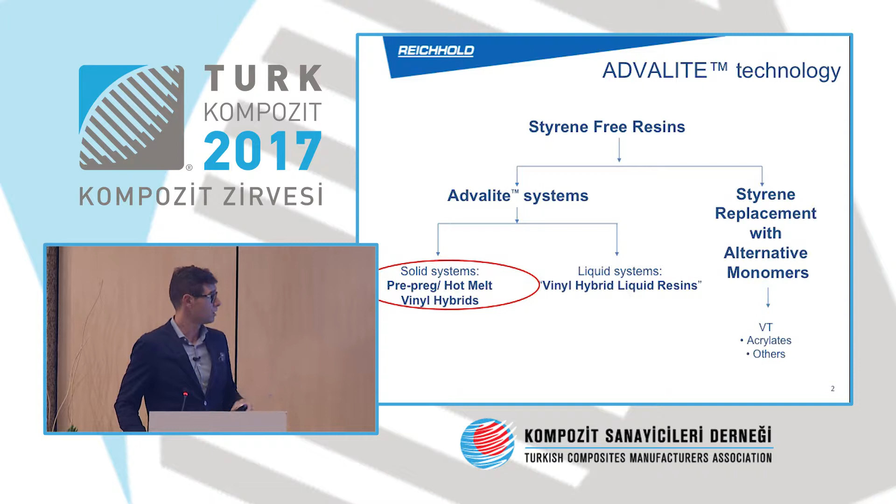So you have basically two systems to avoid the utilization of styrene in the resin. Use styrene replacement like acrylate or the alternative monomer, or you can use ADVALITE system that is a completely styrene and monomer free resin. So in this case we develop a hot melt prepreg system and liquid system.

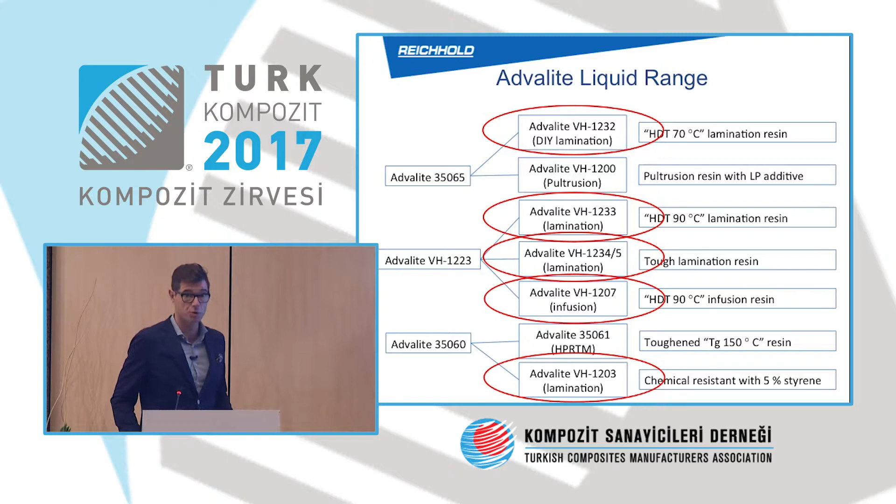As you can see, we have different kind of resin for lamination, standard resin for lamination, resin for lamination with high HDT, resin for difficult part, difficult lamination, and also resin for infusion. Mechanical properties of ADVALITE resin are really good, close to isophthalic resin properties.

And as you can see, after just one day without post-curing, you can get good HDT, good residual enthalpy, and good TG. And after 3 weeks with only 24 hours at 60 degrees, you achieve 100% of resin properties. So it means that you have a good elongation, similar to vinyl ester resin. Residual enthalpy is close to 0, and HDT is close to 80 degrees. So performance of the resin are guaranteed also without post-curing and in a really short time.

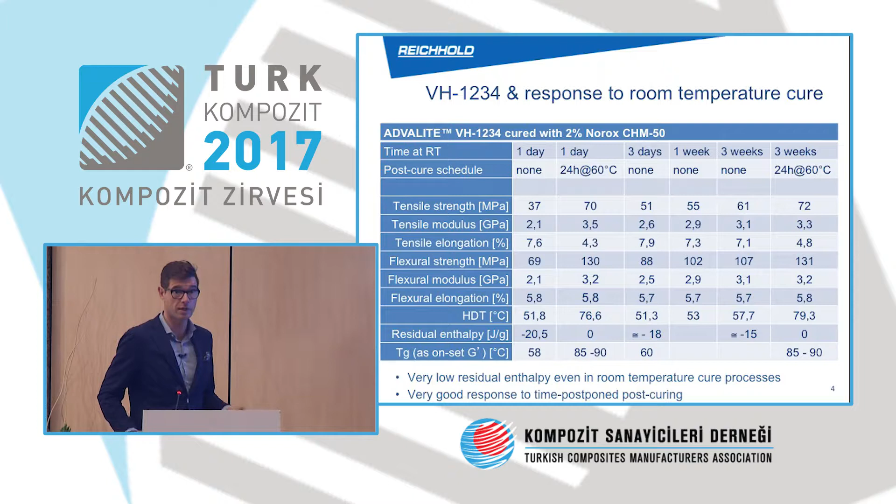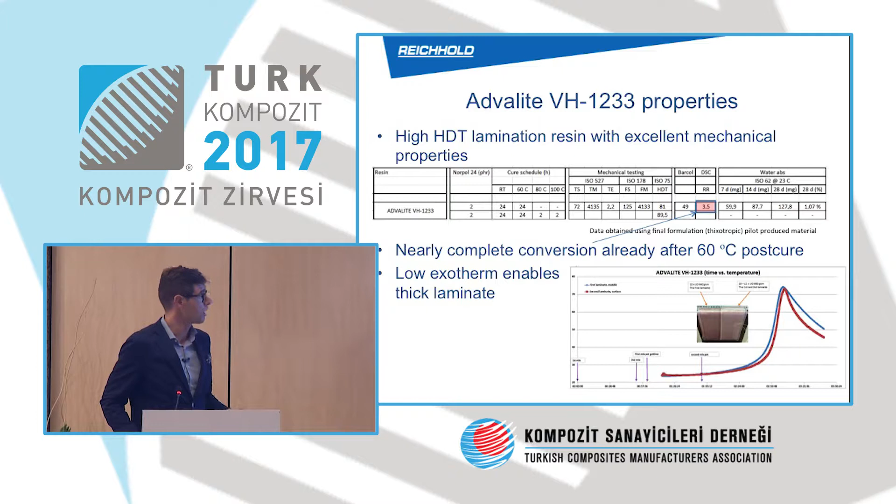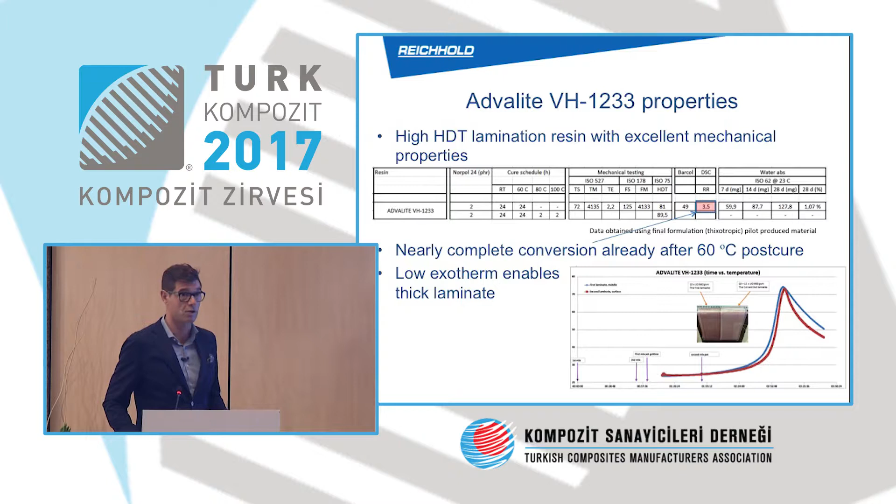Regarding ADVALITE for infusion, we developed this VH1207. It's a really good resin with good flowing, good gel time that you can adjust and manage only changing the catalyst. So in case you want 1 hour of gel time, you can use catalyst like Trigonox 239 to have an example. Or if you want a speed infusion, if you have to infuse a small piece, you can just change the catalyst and use something like Butanox LPT.

Also in this case you have a really good reactivity, fast curing, and exotherm peak is every time really low. Sorry.

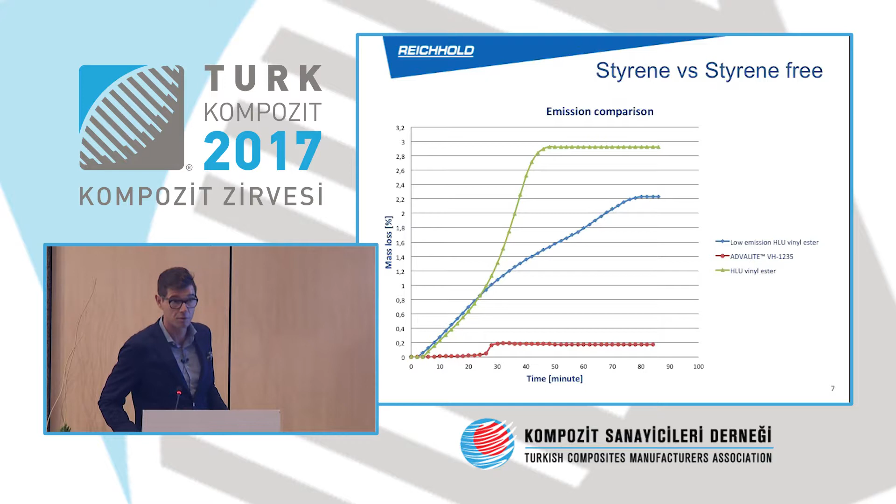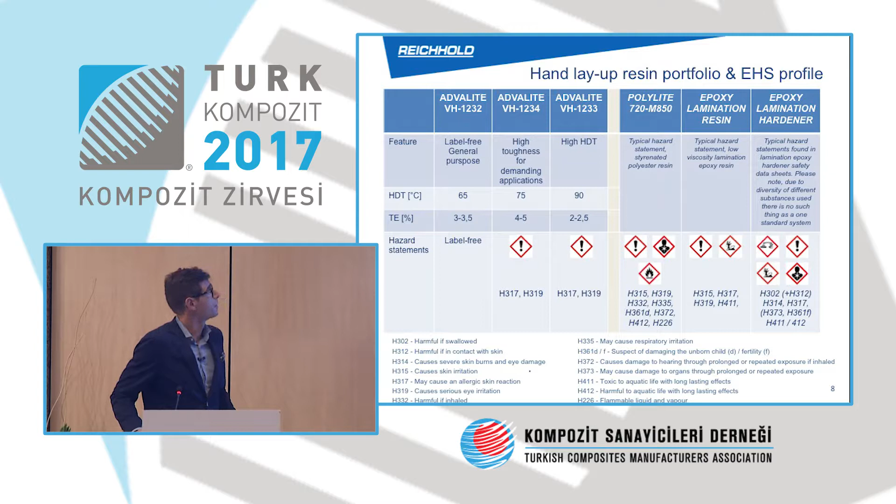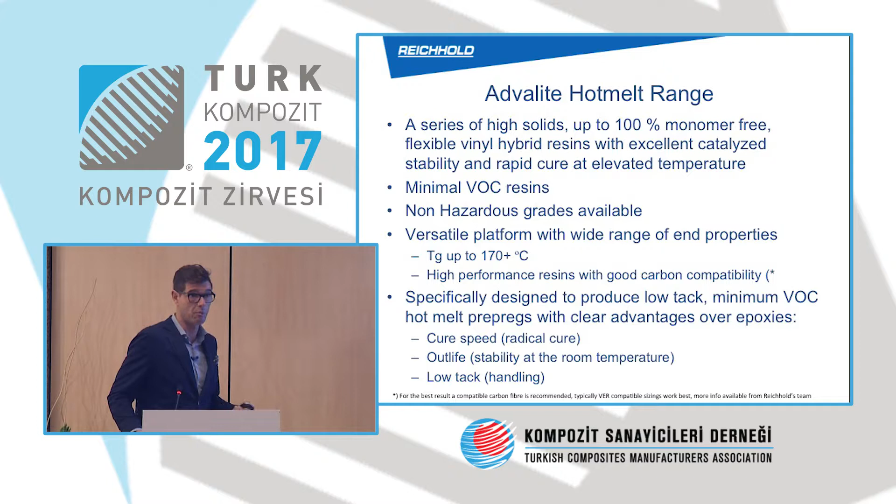In the ADVALITE project we developed and we are developing also resin for hot melt process, so prepreg resin to use with carbon fiber and to make different parts with a different process. So, but this kind of product are still under development, but we are getting a really good result also in this case.

Here you can see a benefit of ADVALITE resin compared to epoxy resin because you have in this case really good stability at room temperature instead of epoxy resin where you have to put it at low temperature, and you have a really good workability with this kind of resin.

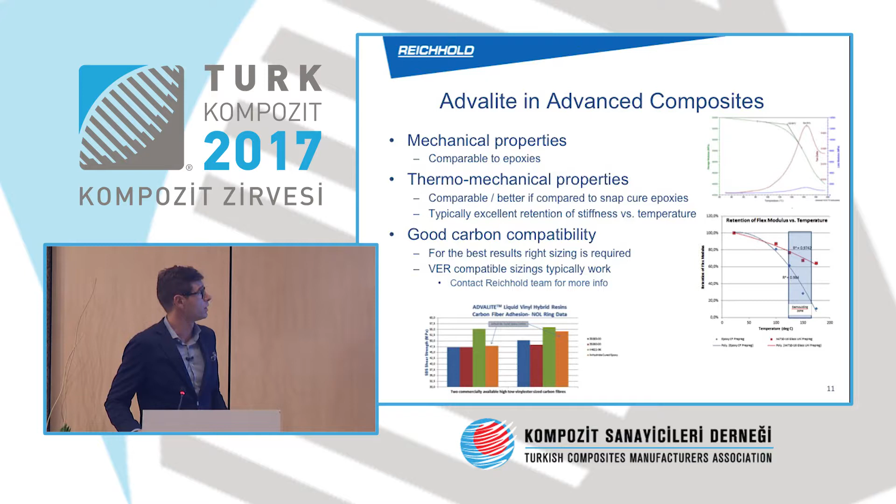Another thing I would like to show you is that with ADVALITE infusion resin you have really 100% compatibility with carbon fiber and aramid fiber. So you can use vinyl ADVALITE infusion resin and also ADVALITE lamination resin where you are still using epoxy resin. So you can substitute this resin without any problem, with the benefit of curing at room temperature.

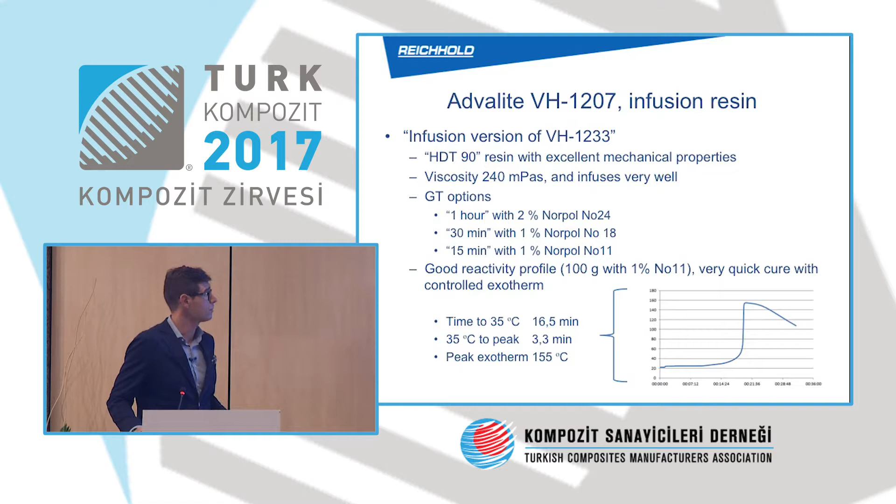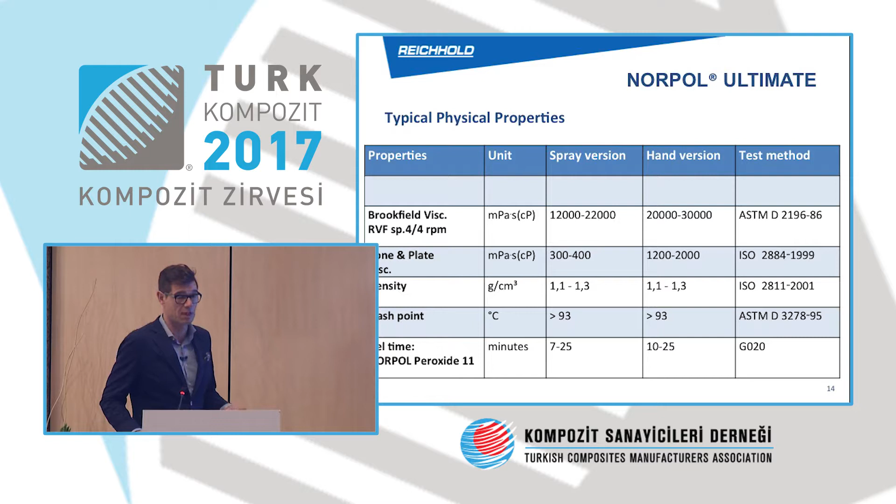Based on the same technology of ADVALITE resin, we also developed Ultimate Gel Coat. It's a gel coat that is styrene-free or with a really low styrene amount. In this case, you can see you have basically the properties of a standard gel coat. So the workability is exactly the same as a standard gel coat. Mechanical properties are really good, similar to an isophthalic gel coat. Good elongation, good HDT, and Barcol is really good also after 24 hours.

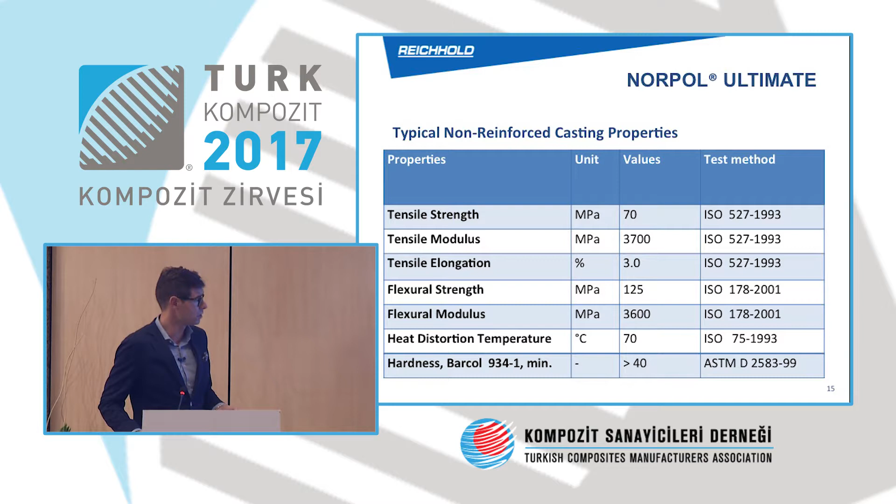In this case, the only thing is that you have to manage the workshop temperature. So basically you have to work between 20 and 25 degrees, not less and not more, because otherwise you will have some problems in the curing. But apart from this, with Ultimate Gel Coat you will get a really good surface, good gloss, and the possibility to paint the gel coat with epoxy paint or other kinds of paint without using any kind of primer.

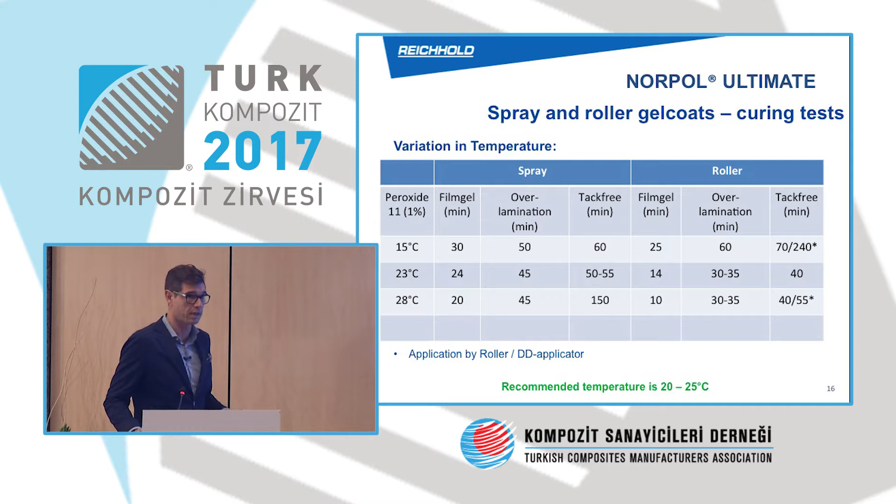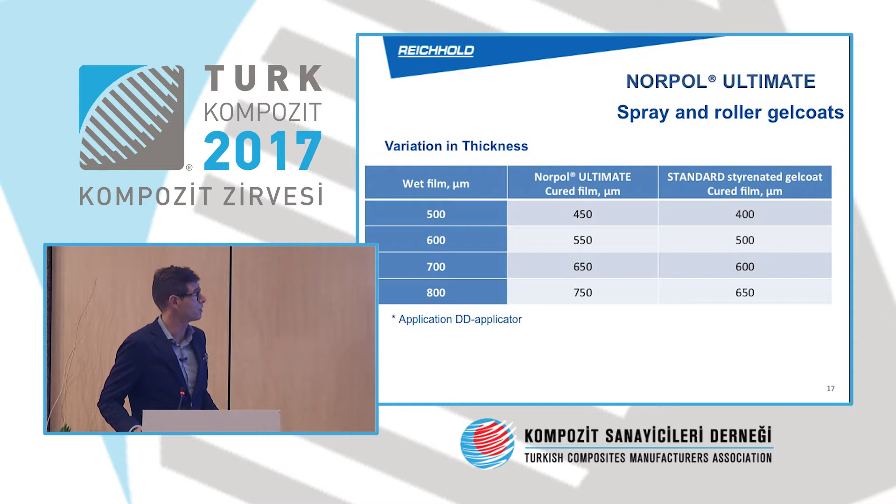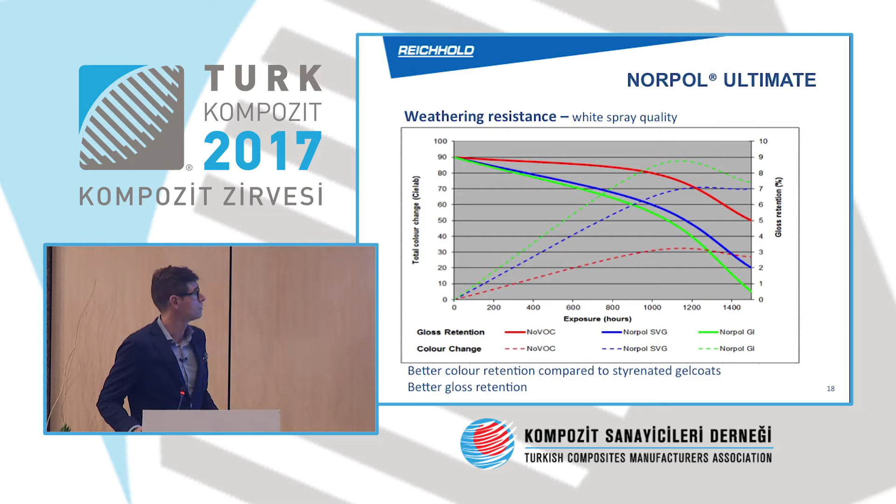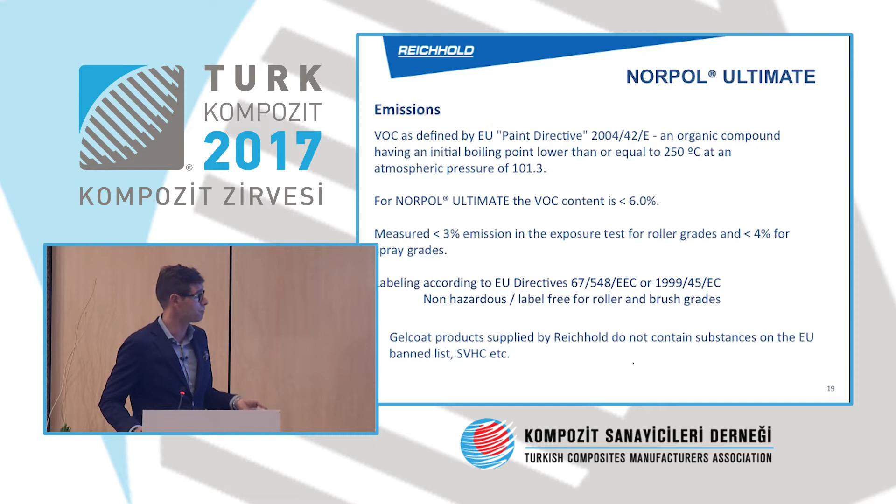Sorry. Okay. So as I told you, you have a really low styrene emission, less than 3% when we are talking about gel coat to apply by brush or by roll, and less than 4% when we are talking about spray grades. And still, this gel coat is available for every kind of application: industrial application, sanitary, and all applications where gel coat is actually used.

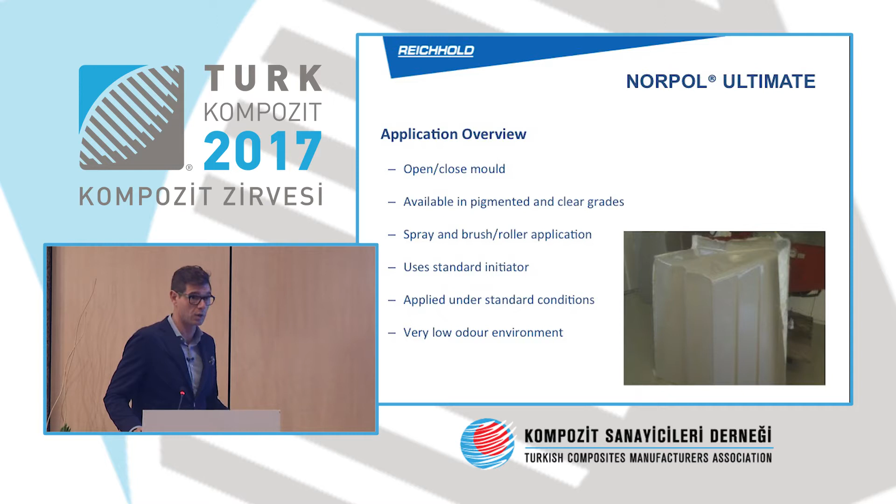So the other new technology Reichhold developed is a cobalt-free technology. In this case, we developed Polylite 463-070. It's a resin especially developed for the Breton system. So in this case, you have a resin that can cure as a standard resin without the introduction of cobalt. You have to use only peroxide, and you get a complete, 100% curing of the resin. Breton tested this resin in its R&D and confirmed that the resin is really good.

A customer that wants to introduce this resin in his Breton system doesn't have to change anything in the system and nothing in the formulation, because the resin is like our standard 463. The good quality of this resin is the absence of cobalt and the possibility to adjust the pot life. So you have a pot life more than 12 hours. This means that during production you can manage production time without problems for the resin.

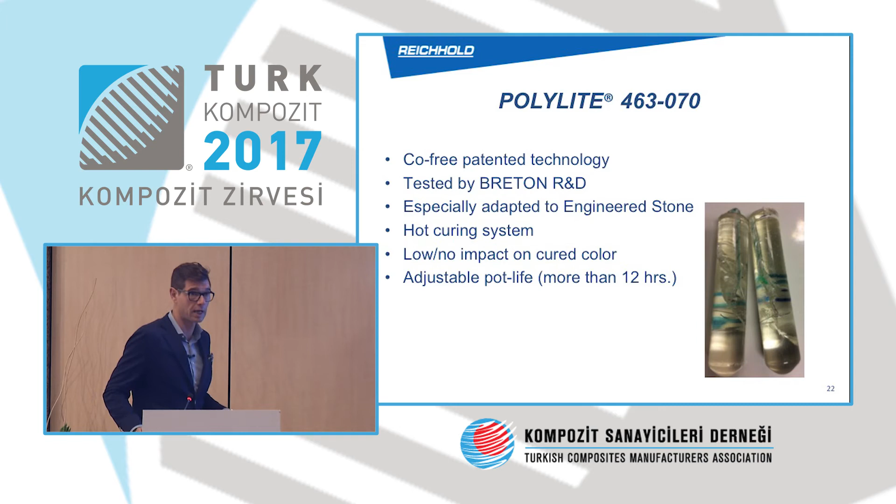Color stability, reactivity, and as I said, pot life benefits, as well as mechanical properties that are still the same as 463 standard, and also absence of cracks, which in a Breton process, an engineered stone process, is really important.

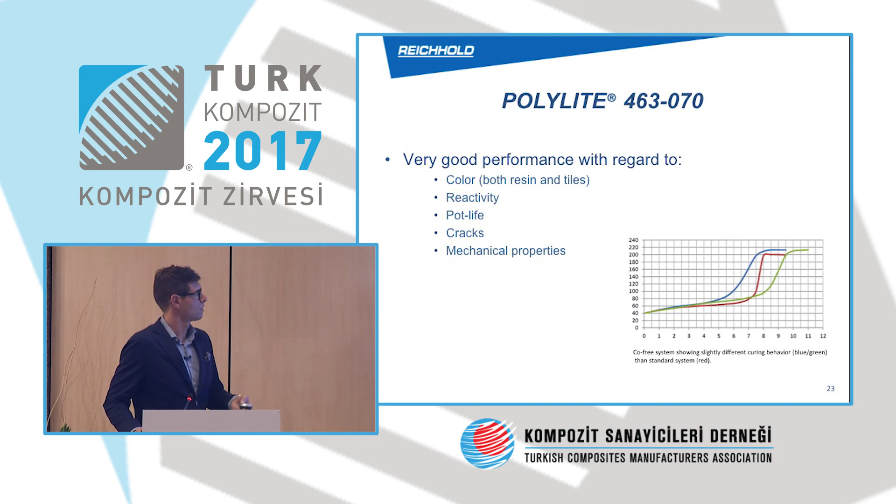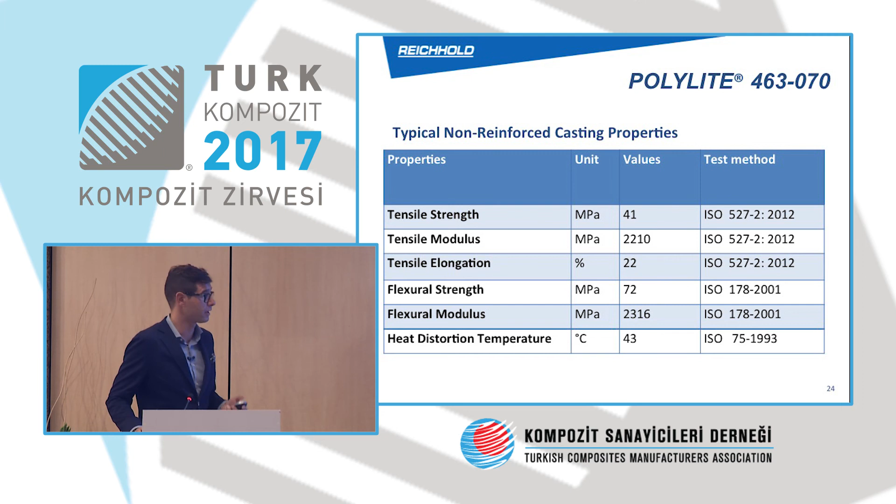Here you can see mechanical properties. HDT is standard. Elongation is really good, 22%. So it means that when you make engineered stone slabs or cubes, you don't have problems of cracks or defects when you cut the slabs.